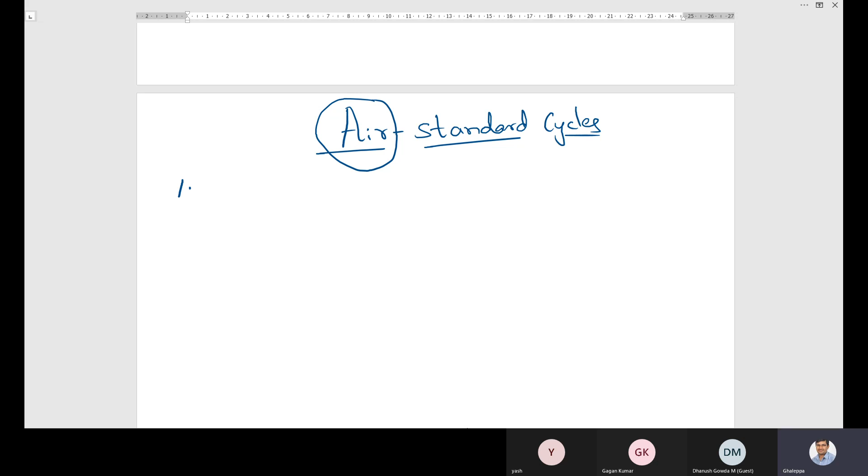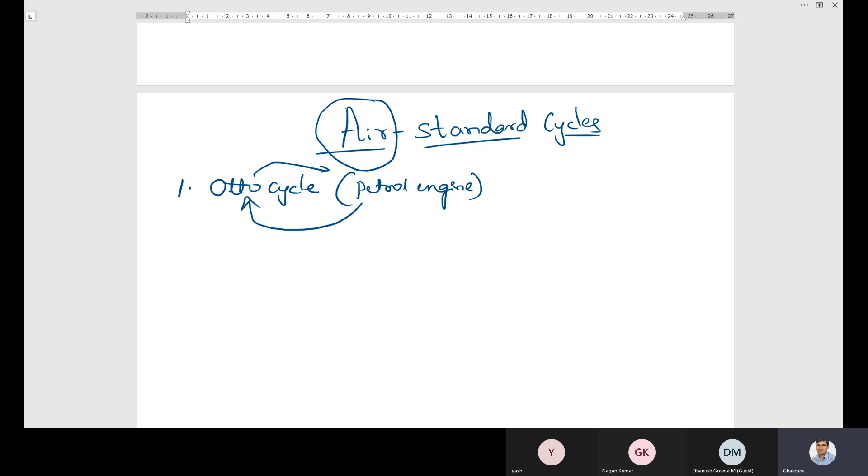The first cycle is the Otto cycle. Otto is the name of the scientist who discovered the petrol engine. So the petrol engine works on the principle of the Otto cycle, Otto's thermodynamic cycle. This cycle is also called the constant volume cycle. Don't worry, I will explain why it is called constant volume cycle in the next topic.

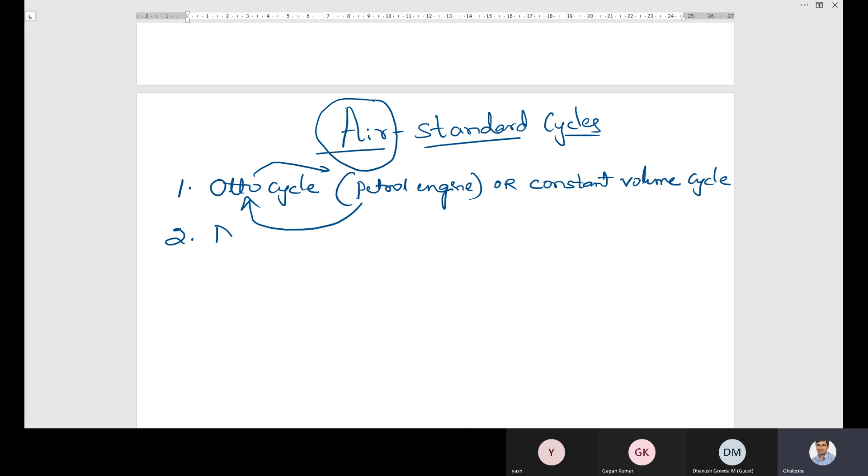The second type of air standard cycle is the diesel cycle. Diesel cycle is nothing but the diesel engine. Dear students, now tell me, diesel engine works on which thermodynamic cycle? In the first point I told you petrol engine works on the principle of the Otto cycle. Now you tell me, diesel engine works on which thermodynamic cycle?

So it works on compression, sir. No. Compression ignition engine is diesel engine. Both are the same - you can call it diesel engine or compression ignition engine.

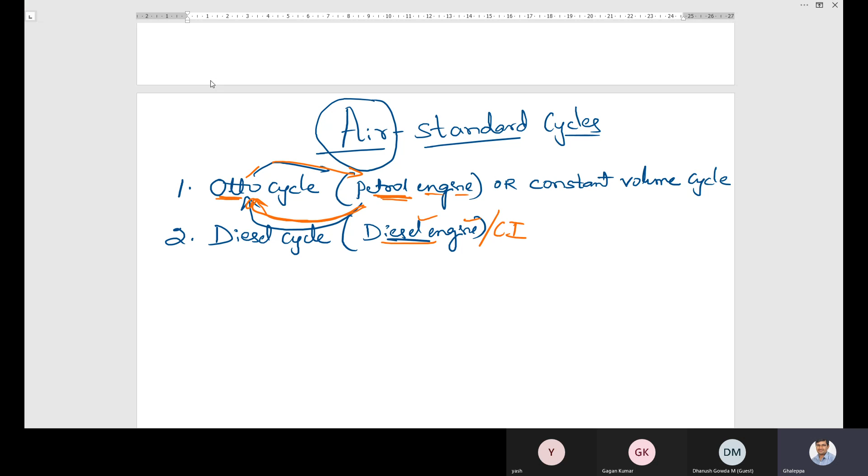But dear students, I am giving you a hint. Otto cycle is also called petrol engine. Otto is the name of the scientist who discovered the petrol engine. Petrol engine works on the principle of Otto cycle. So using this point, tell me now, who is the father of diesel engine? Who discovered the diesel engine?

Just look at how I'm explaining these points now. Otto cycle is related to petrol engine. Petrol engine works on the principle of Otto cycle. Just look at the first word - Otto. The second word is cycle. My question is, using this same concept, apply it for the second point.

Diesel engine works on the principle of which cycle? Diesel cycle. So diesel is the name of the inventor, the scientist who discovered the diesel engine. Keep this in mind - diesel is the inventor of the diesel cycle. So all diesel engines in the world work on the principle of the diesel cycle.

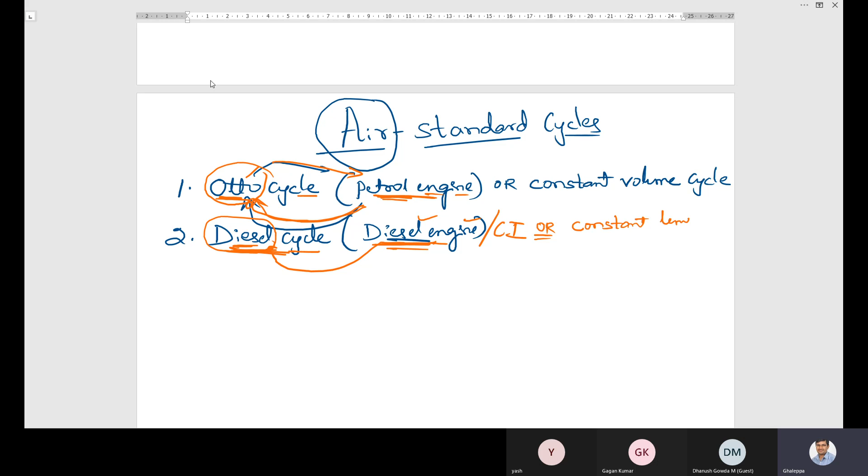So the diesel cycle is also called, keep this in mind - later I will explain when deriving the equations - the constant pressure cycle. So you need to understand the difference between these two. Petrol engine is the constant volume cycle, diesel engine is the constant pressure cycle. In interviews or viva questions in the laboratory next semester, they may ask you: who is the inventor of the petrol engine?

You should say Otto - Otto is the name of the scientist, sir, he is the inventor. And petrol engine works on which principle, which thermodynamic cycle? You should say it works on the Otto cycle, sir. And petrol engine is also called what? Spark ignition engine. Why am I telling you all these names?

The reason is we will be using these terms when solving numericals. In the numericals, they may not always give petrol engine - they may change the word and give spark ignition engine instead. So spark ignition engine is also called the constant volume cycle. Don't worry as of now, I will explain why it is called constant volume cycle. So the second cycle is diesel cycle.

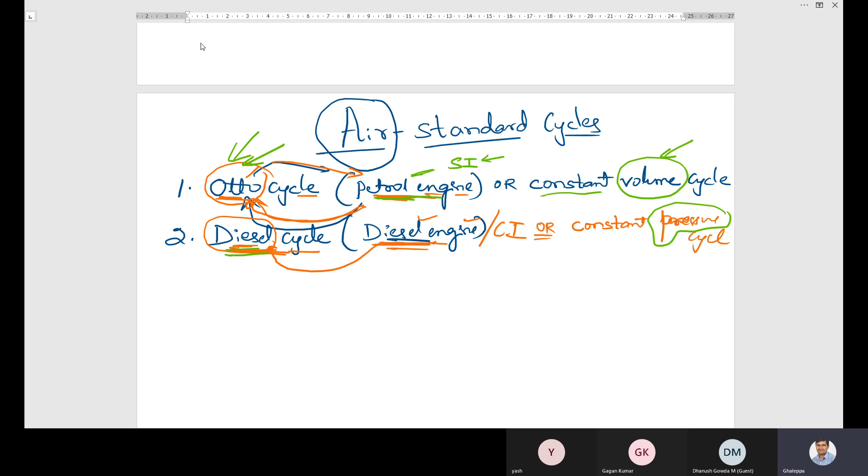These are two points. The third cycle, dear students, is the dual cycle. Dear students, what do you mean by dual? Here, using common sense, I am asking you in general - do not worry about the thermodynamics. So what do you mean by dual here? Dual means what? Try to understand what dual means.

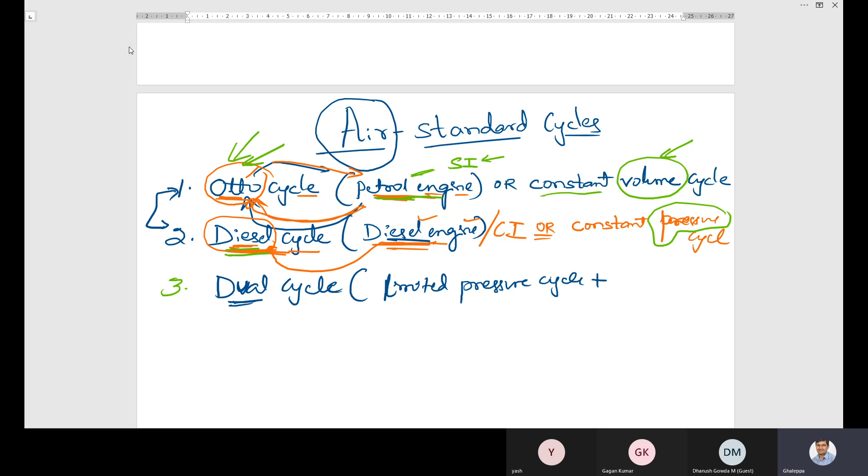In common terms, dual means double, that means two. So here, the dual cycle is a combination of these two - it is a combination of petrol engine and diesel engine. But we will not call it petrol plus diesel engine. Instead of adding petrol engine plus diesel engine, we use the terms limited pressure cycle and limited volume cycle. It is a combination of both - meaning 50% is constant pressure, the remaining 50% is constant volume. Have you understood now the difference between these two?

What are the three cycles? The Otto cycle, diesel cycle, and dual cycle. These three are what we are going to discuss in air standard cycles.

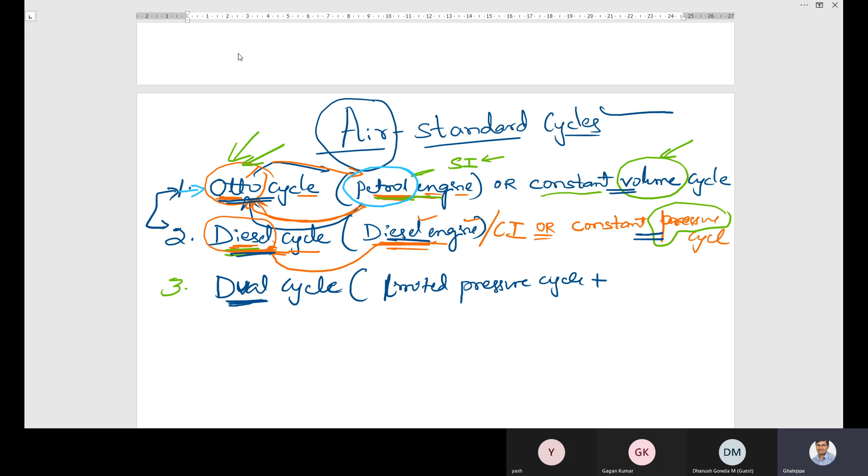Now the question arises, in the first cycle, Otto cycle, used in petrol engine, which is the working fluid? Petrol. In the diesel engine? Diesel. If it is dual cycle, you can use petrol or diesel or any gas in this third cycle.

Now why do they call it air standard cycles? Why not petrol cycle or diesel cycle? They are called, in general, air standard cycles. The reason is in our theoretical study, whichever engine it may be, petrol, diesel, or any gas engine, we are treating the working fluid as air.

I will be solving numericals on the Otto cycle, taking constant volume, but treating the working fluid not as petrol but as the standard fluid, that is air. Because air is a perfect gas, PV equals mRT, you can apply this equation. If I take petrol as working fluid, even theoretically I cannot apply this equation because petrol will not always behave like an ideal gas.

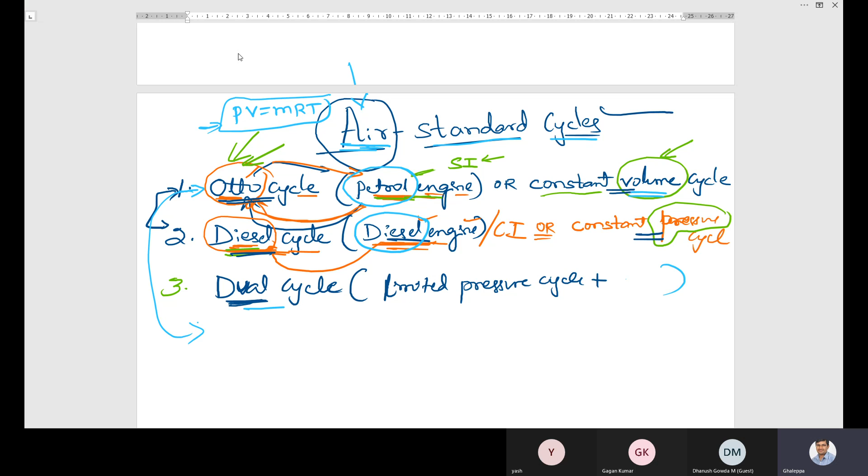We cannot. Understood? Why we are calling it air standard cycle? Because in all these three cycles, we assume the working fluid is air, and we solve numericals and performance parameters. Are you able to understand this first concept?

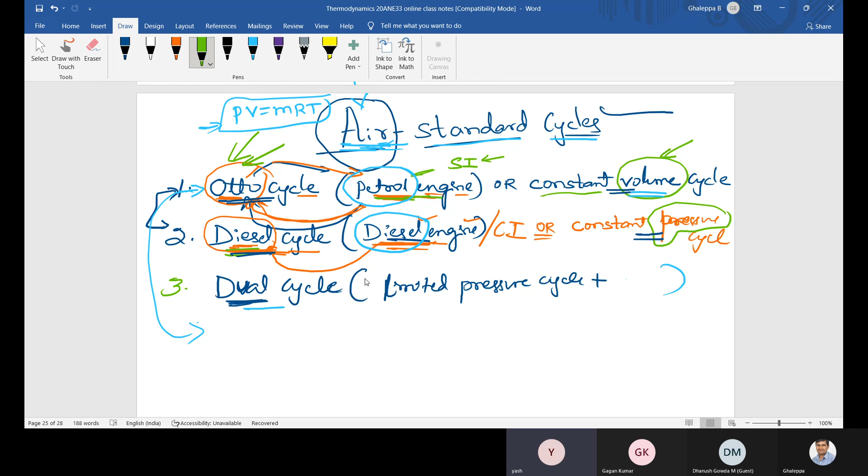Yes sir. Okay, now the second concept: a petrol engine is nothing but a piston cylinder arrangement. First I will draw one cylinder, and here it is. This is cylinder, this is piston.

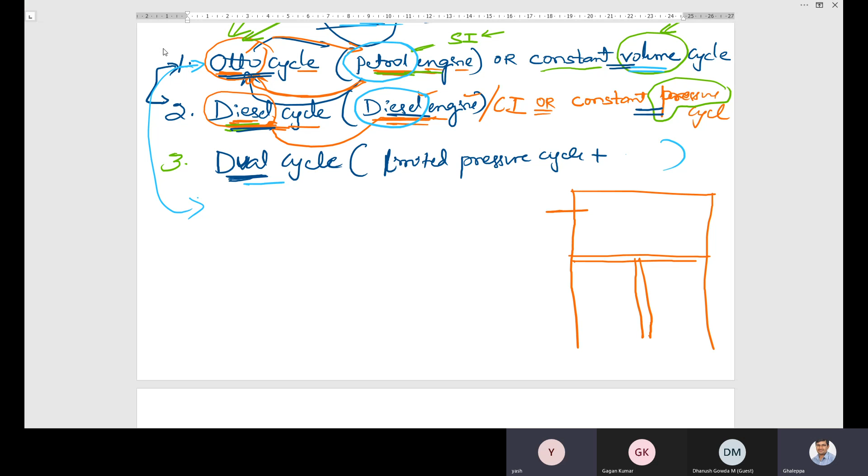And dear student, there will be two dead centers. What are those two dead centers in piston and cylinder in the automobile engine? Yes, very good, that is top dead center and bottom dead center.

So the distance traveled by this piston between these two dead centers, what do you call it? Assume during operation this piston will move up and down, towards TDC and come back and stop at BDC. So the distance traveled by this piston is called stroke.

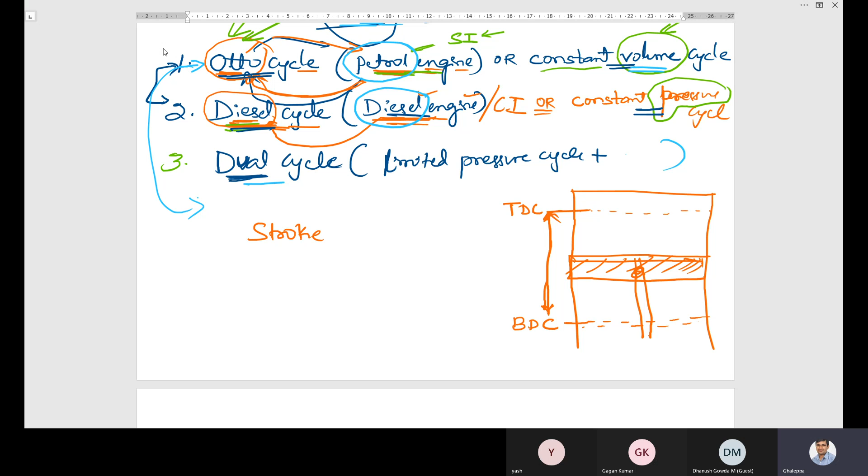Keep in mind, stroke means the height or distance between TDC to BDC. I will represent it with the symbol L, stroke length. If it is stroke volume, I will call it Vs. Keep in mind, Vs is the stroke volume, or you can call it swept volume, stroke volume.

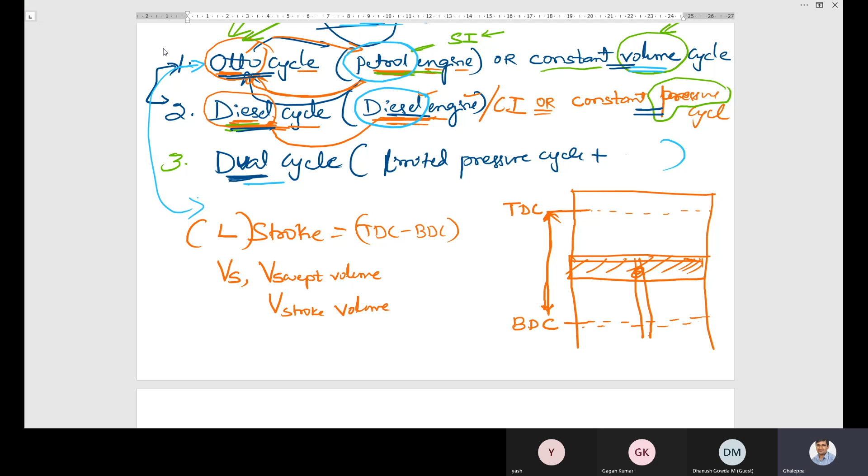And one more thing, since it is a cycle, this piston is moving up and down, so it is undergoing some displacement, so it is also called displacement volume. All three are the same. Here Vs, and I can also write it as VD.

And dear students, what is stroke? This is L, stroke length, if given in the numerical it is L, that is the distance between TDC to BDC. The unit of these three, swept volume, stroke volume, or displacement volume, is always in meter cube.

Now I will show you one picture how to identify. There is another volume that comes into the picture. I will ask you a question: what is the volume of gas here, when the piston is in top dead center? This is the position of the piston, assume this is the piston.

Instead of here, the piston has come to top dead center and all gases have got compressed here. So what is the volume of this gas, what do you call it? Clearance volume. Usually clearance volume. Very good, Vc is called clearance volume.

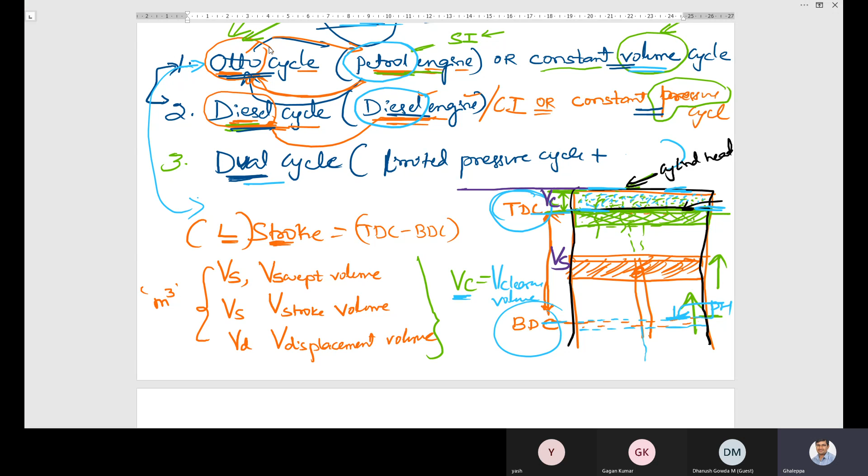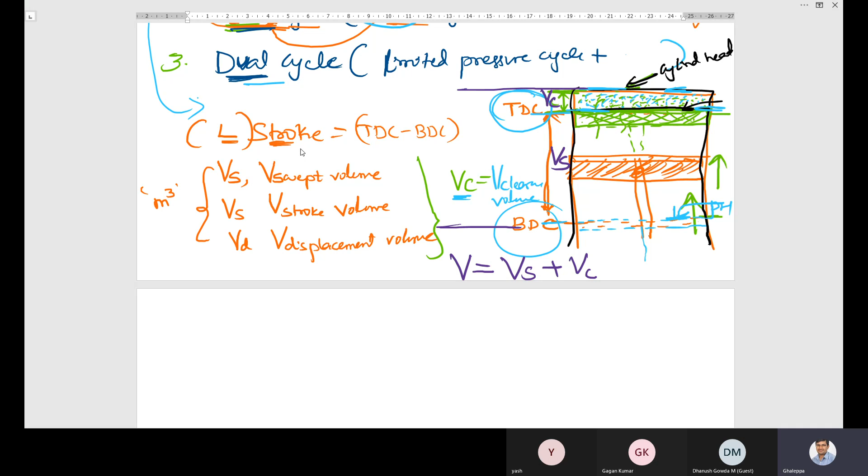For example, if you have a Pulsar 150cc bike with you, what is meant by 150cc? Pulsar 150cc and Bullet 350cc, Classic, Thunderbird 350cc, like that - there are many engines out there.

So 150cc means what? It is called cubic centimeter, 150 centimeter cube. The unit of this volume given is 150 centimeter cube. 150 is nothing but the total volume of the cylinder. If you take a petrol engine, the Splendor petrol engine is 100cc - that is the total volume of that Splendor engine. Out of 100, some portion is VC and some portion will be VS.

Sometimes in car engines, maybe Tata Sport or EcoSport or Ford, they write on the back side of the car specifications like 2 liters, 1.5 L. We might have seen some specifications on the car at the back side. 1.5 L is nothing but the volume of the cylinder, each cylinder. Sometimes you may observe 1.5 into 4, meaning there are 4 cylinders, each with volume 1.5 liter, like that.

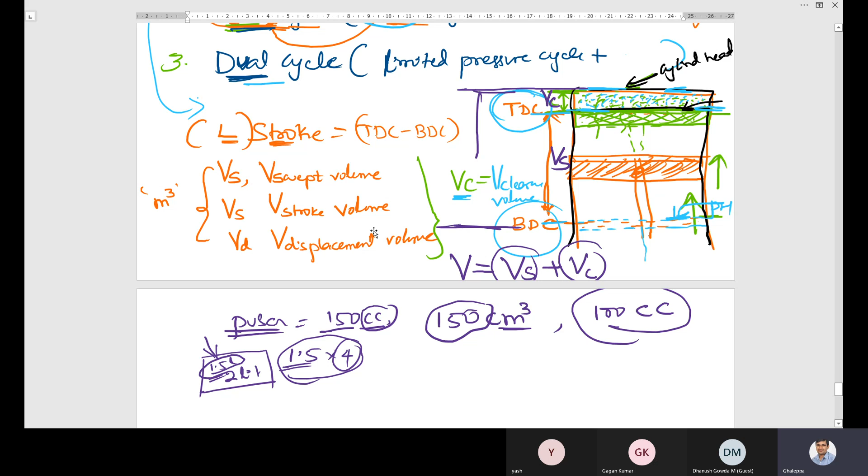I will show you one picture now, how to identify the clearance volume, stroke volume, and all. Dear students, can you see this GIF file picture?

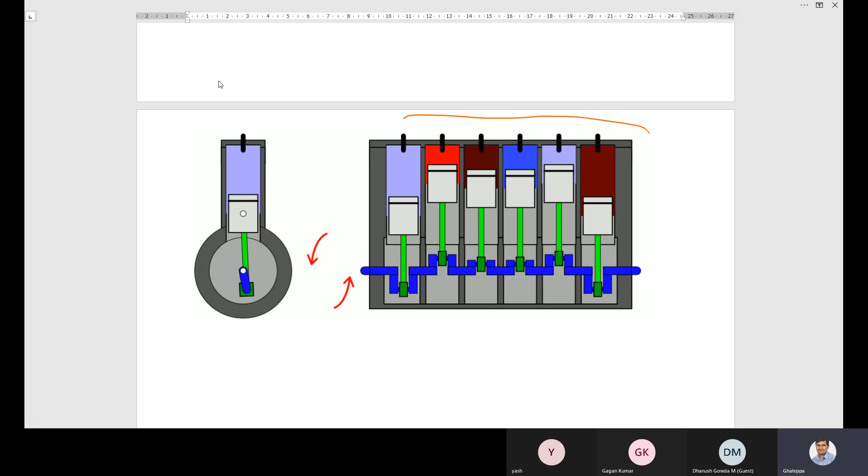Dear students, now you tell me how many engines, how many cylinders are there? There is only one engine, but how many cylinders are there in this picture? One, two, three, four, five, six - 6 cylinders. And keep in mind, I will be writing N, number of cylinders are 6.

Now I don't want to elaborate more on number of cylinders. Just keep in mind in the numericals you will be given n equal to 6, n equal to 5. And dear students, in this picture, on the left hand side, how many cylinders are there? N is equal to 1. Now we need to identify the VC, VS, and all.

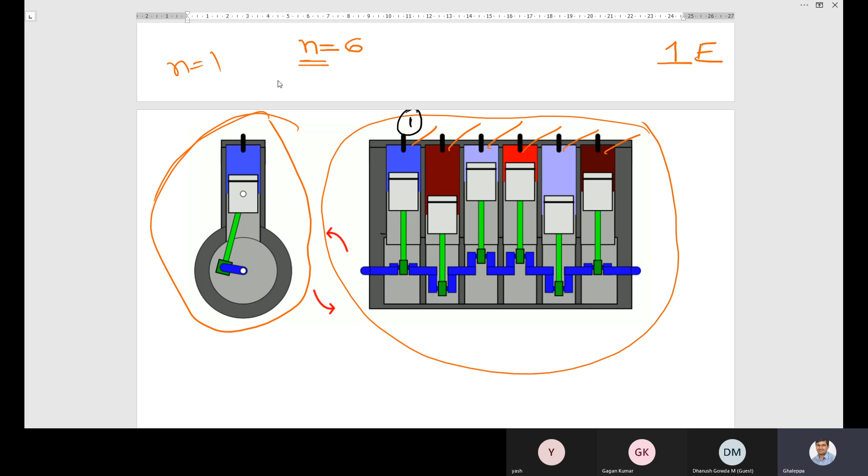Now I will take the picture here. In the first cylinder, all of you look here. This is the bottom side - see, up to here it will move, it will not move below this, so it is BDC. And here, up to the maximum point it is moving up to here, that is top dead center. If it is moving up to here, you assume it is BDC up to here, otherwise it is stopping here - you take it as BDC.

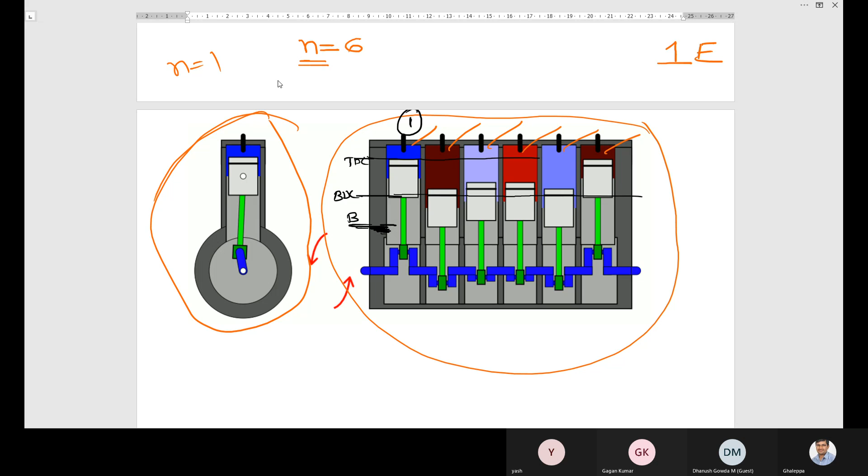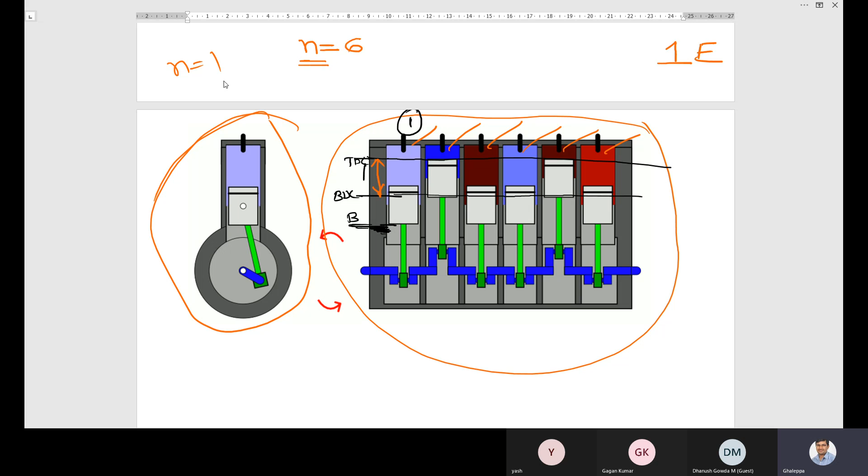All engines are at the same BDC - see here, this is also same. It will stop here only, and that is top dead center. The distance between these two, in the first cylinder, I will call it as VS. The distance between TDC and BDC is VS, or VD, displacement. Why you call it displacement is because the piston is undergoing reciprocating motion.

There is a displacement of the piston, that is called displacement volume. One more important point: the combustion of the gas takes place only in the VC part - this part, combustion is taking place. There is a spark plug for each cylinder where combustion takes place. If somebody asks where combustion of petrol takes place in the petrol engine, you should say it is at VC, the clearance volume. Only in the clearance volume does combustion of the gases take place. So now I understood what is VS, VD, and VC - clearance volume, swept volume, and stroke volume. Remember this.

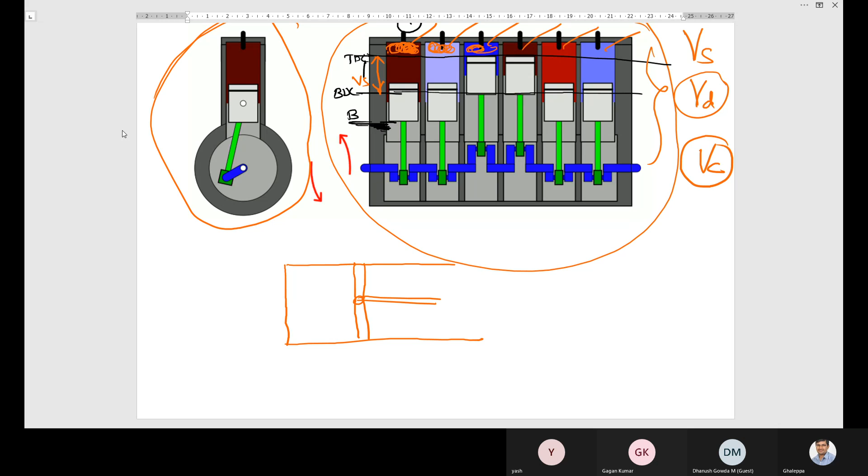Now, dear students, this was a vertical cylinder. I will draw a horizontal cylinder. This is the horizontal cylinder, this is a piston, this is the connecting rod. This is the maximum point where the piston moves downward, so it is called BDC. And this is the maximum point where the piston will move in the upward direction, so I will call it TDC.

Let me take a copy of this picture. I will explain it on the next page, it will be easier. Let me copy the page.

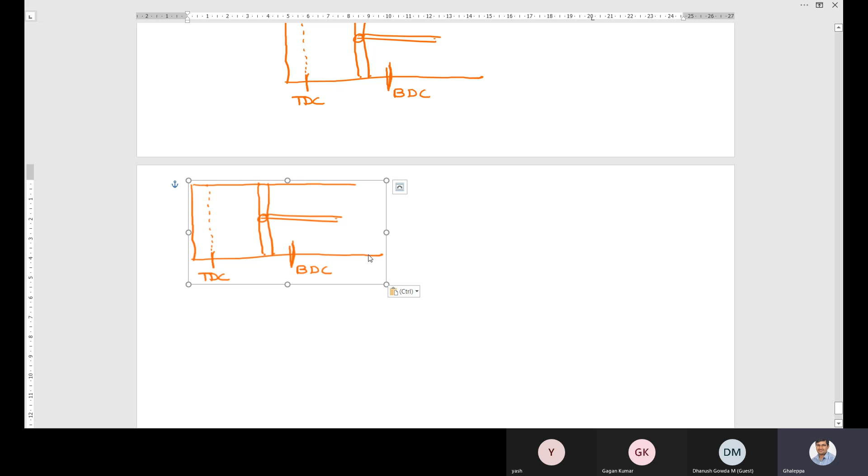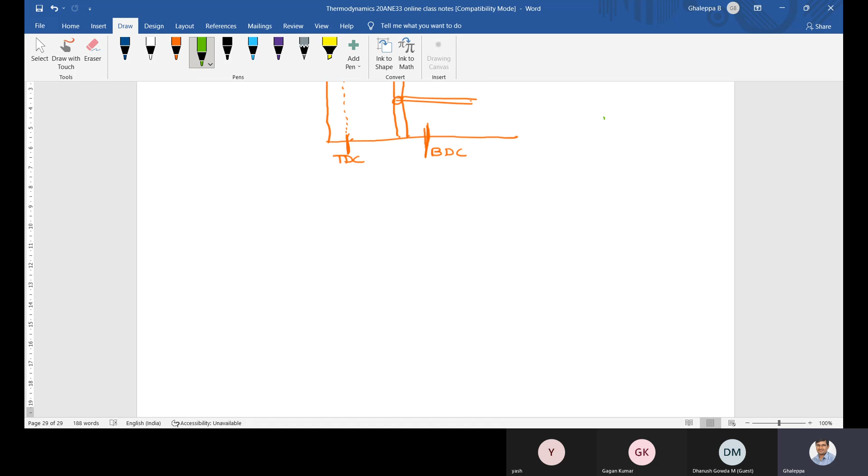Now, the distance between these two, what should I call it? What is the distance between TDC to BDC? I'm writing distance, length - what do you call it? Stroke. Stroke will be represented with which letter? L.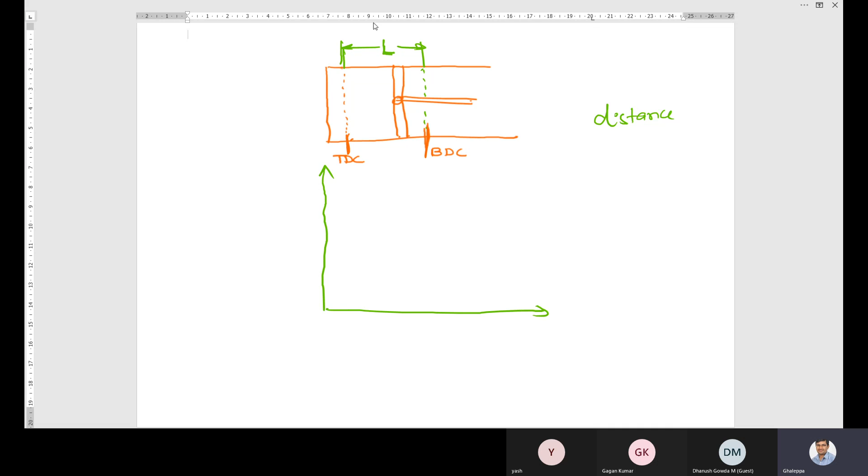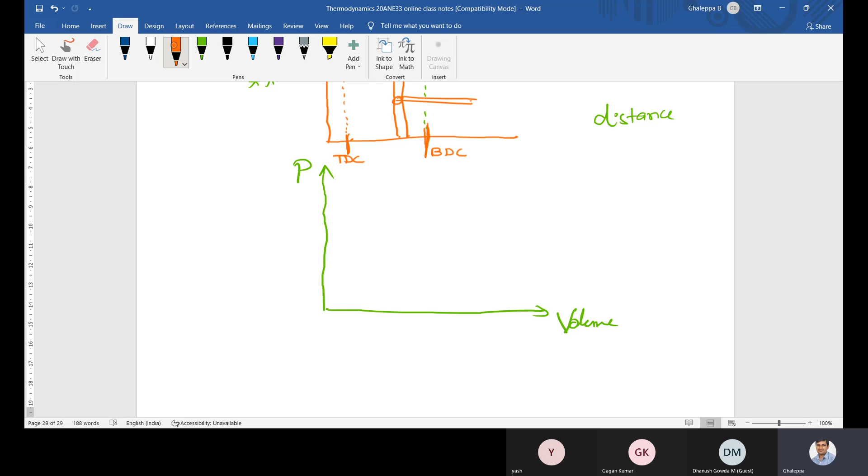Now, my dear students, we will always draw PV and TS diagrams for petrol engine, diesel engine, as well as dual cycle. This is important - how to draw PV and TS diagram of any engine. Just draw one horizontal axis, that is volume, and vertical is pressure. Now, this should be the dead center - we cannot move beyond this. You cannot go beyond these two lines because the piston is always moving between top dead center and BDC, bottom dead center. Compression takes place from bottom dead center to top dead center, and the next stroke comes from TDC to BDC. The PV diagram should lie between TDC to BDC, keep that in mind.

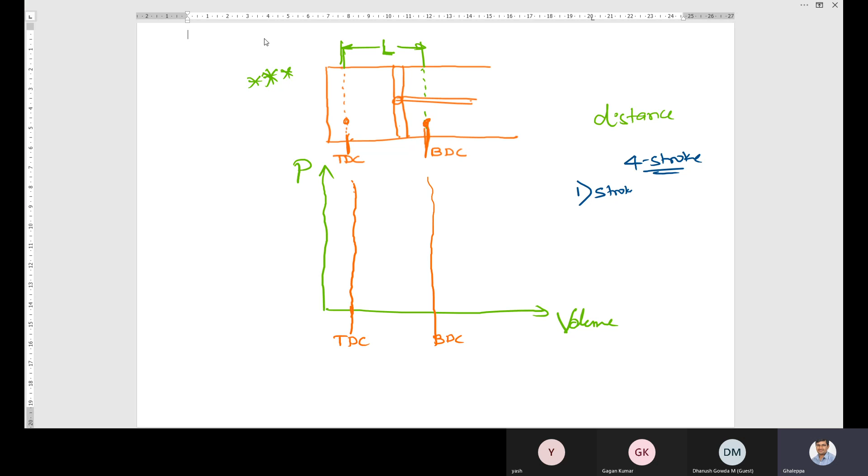Dear students, how many strokes will there be in one cycle? For example, if it is a four-stroke engine, how many strokes will there be? Four strokes. Which are those? First stroke is compression - I will write compression. Next, after compression, combustion, which is also called heat addition.

After that comes the expansion stroke, or power stroke. What is the last of the four strokes? Exhaust.

Dear students, combustion is also called heat addition, so I will write heat addition here. And the opposite word of heat addition will be heat rejection, or exhaust. Dear students, there are small mistakes you need to correct. Here there are six processes, but how many strokes? There will be only four strokes. Strokes are different, processes are different. I will tell you which are the strokes, which are the processes.

Before compression, there is one more process that takes place. What is that process called? For example, this is the piston and cylinder alignment, with the inlet valve and exhaust valve. What will be the basic first step when the engine starts? When the piston moves downward, suction takes place and the inlet valve is open. When the piston moves downward, the suction creates vacuum pressure inside the cylinder. Vacuum means less pressure, below atmospheric pressure, while outside it is above atmospheric pressure. Fluid always flows from high pressure to low pressure. Vacuum is nothing but low pressure, below atmospheric pressure. So when suction pressure creates a vacuum inside the cylinder, the petrol and air get inside.

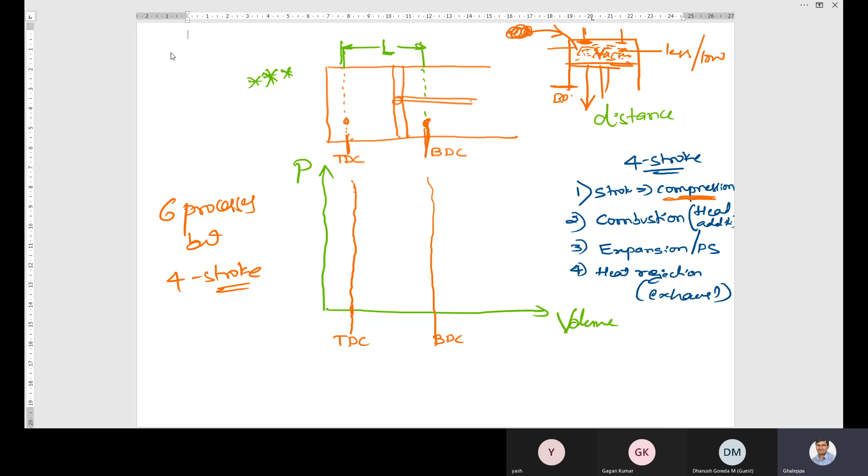This happens through the inlet valve - the inlet valve becomes open, and the piston moves towards BDC, that is from TDC to BDC. This is the first stroke, the suction stroke - suction stroke and suction process. I will write the process on the left and the stroke here, to avoid confusion. So the first process is the suction process.

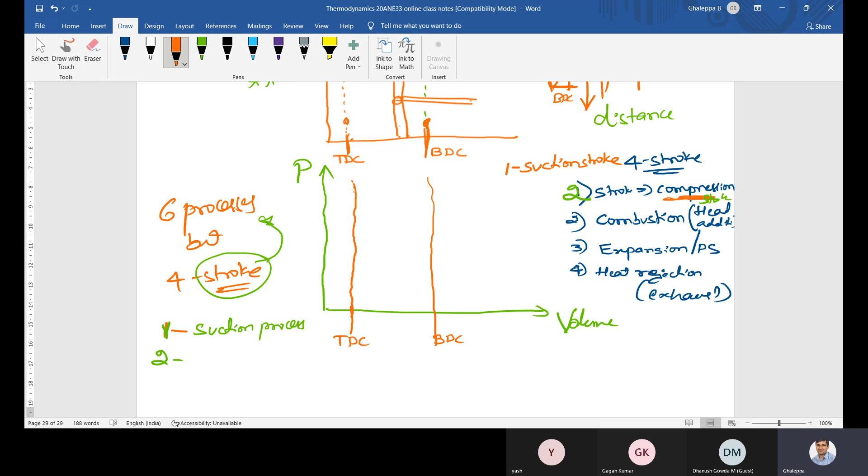Keep in mind, all strokes are processes, but all processes are not strokes. Please try to understand what this means - all strokes are processes, but there are some processes in the engine we cannot consider as a stroke. Next, the second stroke is compression - what you said is right, that is the compression stroke, so stroke is nothing but a process. All strokes are processes, so I will write here compression. During the compression process, the piston moves from BDC to TDC.

Compression means it is going upward, from BDC to TDC. So I will draw the PV diagram for the compression process.

At the beginning of compression, it is at BDC, because compression begins from BDC to TDC. During compression, the volume of gas inside the cylinder decreases when you compress it. Volume decreases, and pressure increases.

So now we have to draw the PV diagram for the compression process, the second process, such that volume on the x-axis decreases and pressure on the y-axis increases. This is point number 2. If someone asks you to draw a compression stroke in a PV diagram, you should start from BDC and end at TDC. So volume is decreasing. This is the initial volume V1 and this is V2.

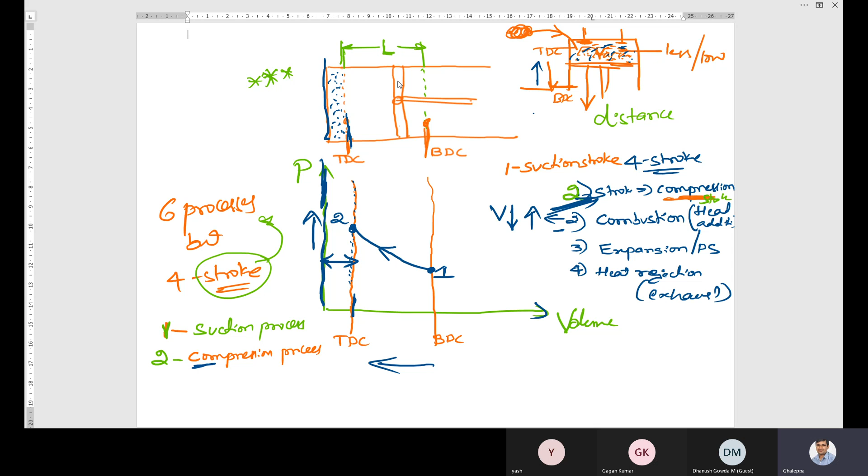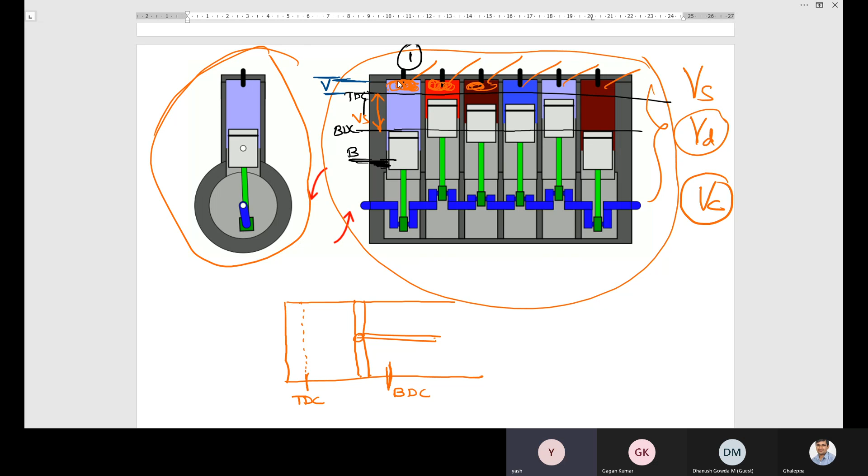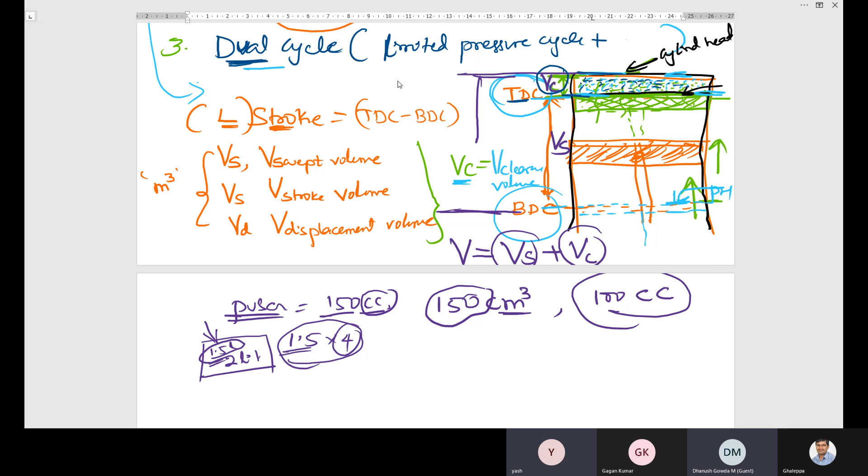VS. Okay, what is this? The distance between cylinder head and piston at TDC, what do you call this gap? VC. This is VC, not VS. VS is the distance between BDC to TDC. If I ask what is this volume, you should say it is VS, stroke or displacement volume. Keep in mind, this one is VC, clearance volume.

I cannot move the PV diagram to the left of this straight line. We should stop here because the piston will not move beyond TDC, and it will not move beyond BDC either. So the first process is suction stroke, and the second process is compression stroke.

Sir, we have not represented the suction stroke here. Yes, I have not shown it here. That is 0 to 1. The pressure inside the cylinder, we assume it is constant, so it is 0 to 1, which is the suction stroke, suction process.

The second process is compression process, that is compression stroke. Next, which process will be there? You said it is combustion. Dear students, keep in mind, combustion is only a process, it is not a stroke.

Why it is not a stroke? Because during the combustion process, there is no movement of the piston. The piston will be at TDC only, and combustion takes only milliseconds. We are not saying it takes 5 minutes, 10 minutes, or 1 hour. Within a fraction of seconds, the combustion process completes. So combustion happens at TDC, when the piston is at TDC.

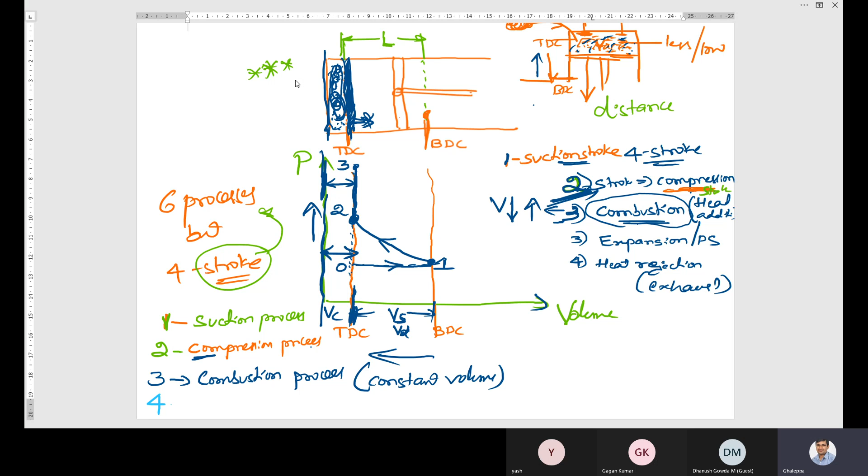So next, the fourth process. Dear students, what is the fourth stroke? Expansion stroke, or expansion process, both are the same. During expansion, the piston will again move towards BDC, coming from TDC to BDC. So there is a displacement volume. During expansion, does the volume increase or decrease? Volume increases. Pressure?

Pressure is not constant. Whenever there is a change in volume, there will be a change in pressure. So when the piston is moving from TDC to BDC, volume increases, so I should draw a downward line. Why downward and not horizontal? Because pressure decreases as volume increases.

So it is the expansion process. The fifth process is the exhaust stroke, which is correct, or heat rejection. So what type of heat rejection? Again, it is constant volume heat rejection.

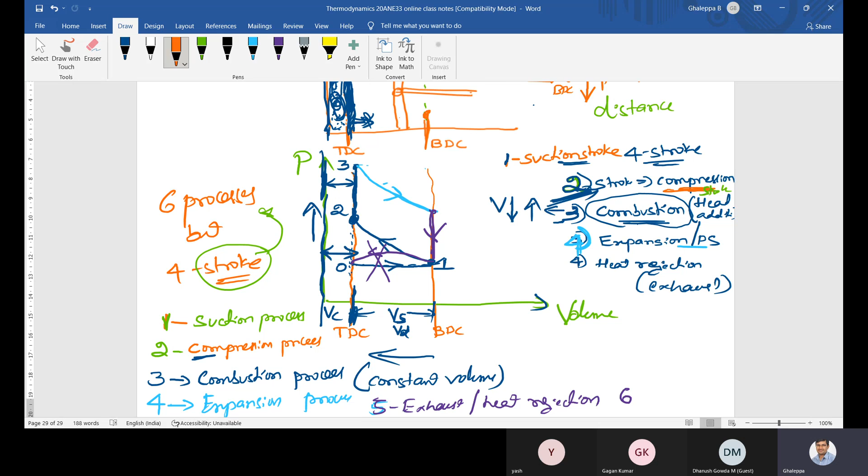The first process is compression. Second process is combustion. Third process is expansion. Fourth process is heat rejection. So out of these 4, there are only 2 strokes and 2 processes. For example, 1 to 2 is the compression stroke, so it's the compression process. Second is constant volume combustion.

There is no movement of the piston during the second process, that is during 2 to 3, it is at constant volume, so we will call it only a process, not a stroke. The third process is expansion. During expansion, there is movement of the piston from TDC to BDC, so this is called the expansion stroke or expansion process.

Why am I calling it expansion stroke? Because there is displacement of the piston, moving from TDC to BDC. Whenever there is a change in displacement or movement of the piston, that is called a stroke. If there is no movement of the piston, no change in its position, then it is called a process only.

So here during 3 to 4, it's expansion, and 4 to 1 is heat rejection. So I will call 4 to 1 as QR, 2 to 3 as QS, and these two are expansion and compression processes.

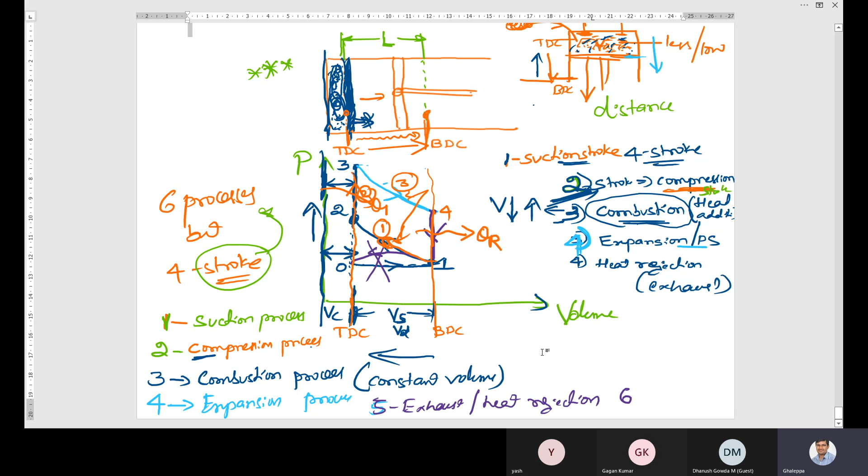So first cycle is, now I will draw one more time. Don't get confused, okay, I will repeat the same words again and again. So first, the cycle we are discussing is the Otto cycle.

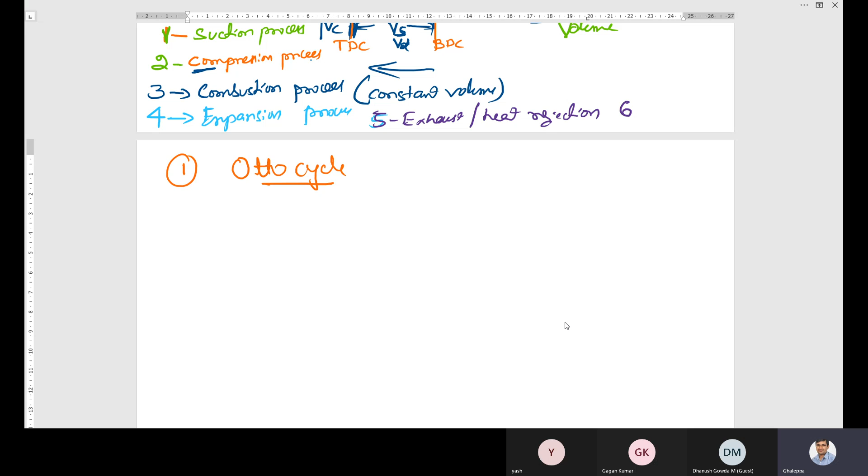Otto cycle is also called the constant volume combustion cycle, or in practice, we call it the petrol engine. All petrol engines work on the principle of the constant volume combustion cycle. Who is the inventor of the constant volume combustion cycle? The father of the constant volume combustion cycle, or petrol engine, is Otto.

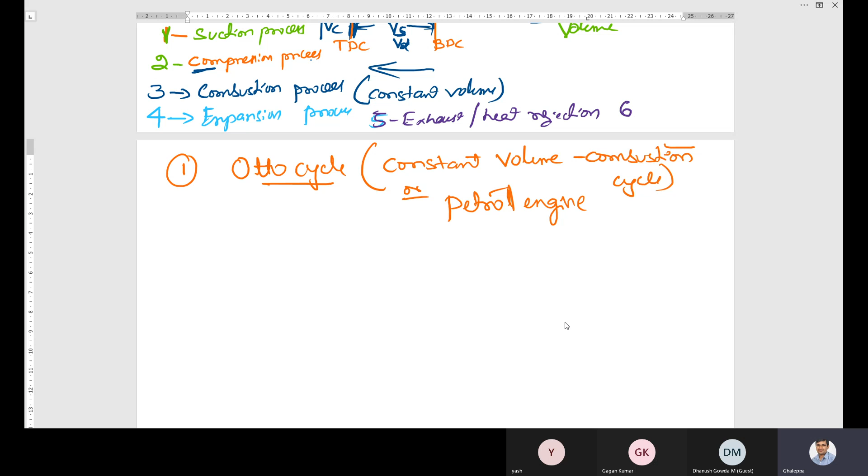You must draw the PV and TS diagrams, my dear students. Please make a habit of drawing PV and TS diagrams for each cycle, so you do not get confused. So first you write P on the y-axis, volume on the x-axis, and we will always draw 1 to 2 first.

1 to 2 is the compression process. During compression, you already agreed it will move from BDC to TDC. Locate some point. BDC is here, TDC is here. BDC is always away from the cylinder head. Assume in your mind this is the cylinder head, the y-axis is the cylinder head, imagine it. So it will move from BDC to TDC.

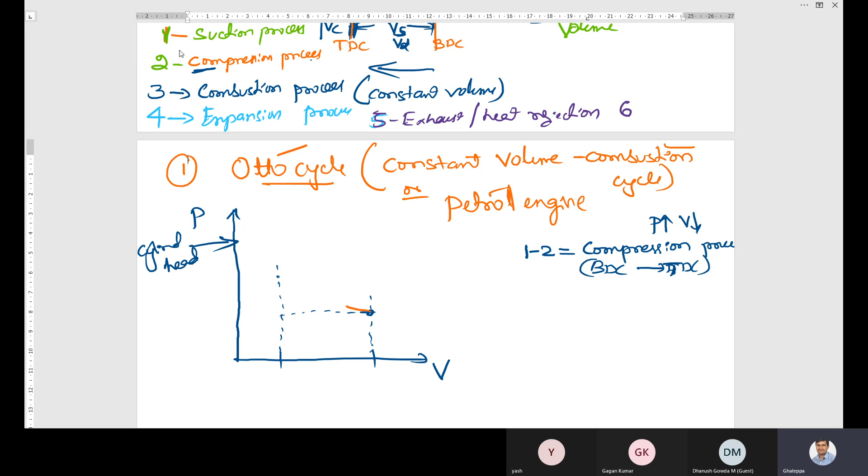It should stop here, but don't draw a horizontal line. Why not? Because during compression, pressure increases and volume decreases. You must draw the PV diagram so that pressure increases and volume decreases. So I have to draw a curved line. I will stop here at point number 2, and this is point number 1.

And dear students, for 1 to 2, shall I show the upward arrow mark or downward arrow mark? Tell me please, using this concept. Upward arrow mark or downward arrow mark? Pressure increases during compression and volume decreases, and this is the starting point.

Are you there, my students? Yes, sir. Hello? Yeah, okay.

Upward arrow mark or downward arrow mark? This is the initial point, I'm using the word initial point. This means where it should be at the outlet, the end point, point number 2. Initial to final is upward arrow mark. This is P1, this will be P2. So pressure increases from initial to final as pressure increases during compression.

And from here to here is V1, volume at point number 1. You should always start from the origin. And from here to here is V2. So from V1 to V2, the volume decreases. Initially volume is V1, say 1 meter cube or 2 meter cube. Again after the end of the process, the volume decreases, so volume is less here and more there.

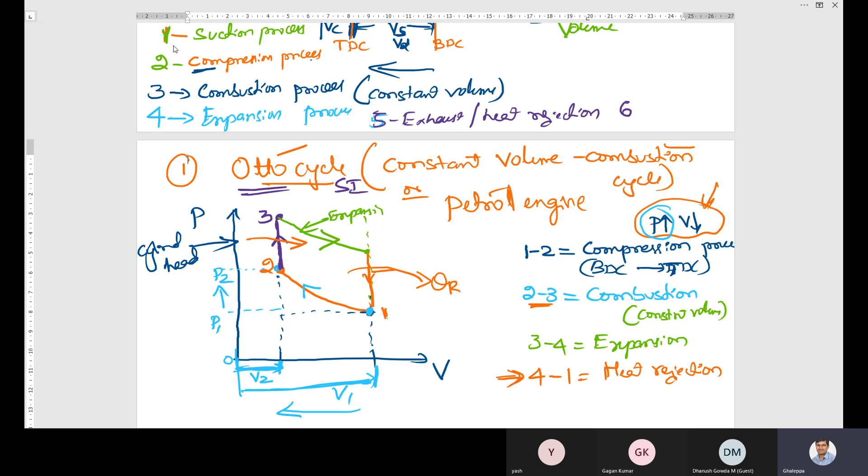Heat is rejected. What is the opposite word of heat rejected? 2 to 3 combustion, during combustion what will happen? Heat addition. Heat addition means heat supplied or heat added. Very good. Okay, it will happen. Don't worry.

So based on QS and QA, my dear student, what should I write for heat rejection? QP or QS, QX, QY? What should we write instead of Q for heat rejection, which is the best word for representing rejection? QR. QR stands for rejection, already I have written here. QR, QS is supplied. Okay.

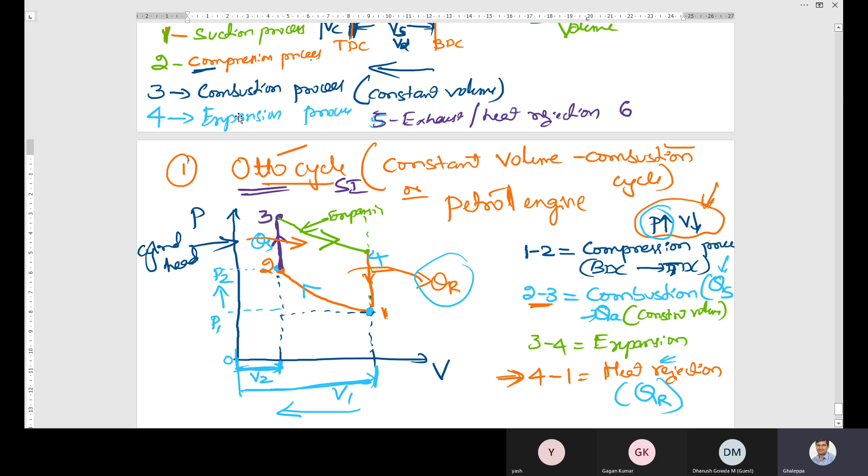So we'll stop here only, because you will get confused. I will make you 100% clear with respect to this. Okay, dear students.

I need to calculate VC. You tell me, VC, whether VC is equal to V1 or VC is equal to V2 in this diagram. No. You tell me which is VC. VC is equal to V2. Very good, mate, very good.

So VC is always, I told you, VC is the volume of gas between the cylinder head and when the piston is at TDC. This is in TDC position. So this is called VC.

VS means what? Swept volume. Or one more name? Stroke volume. One more name? Displacement volume.

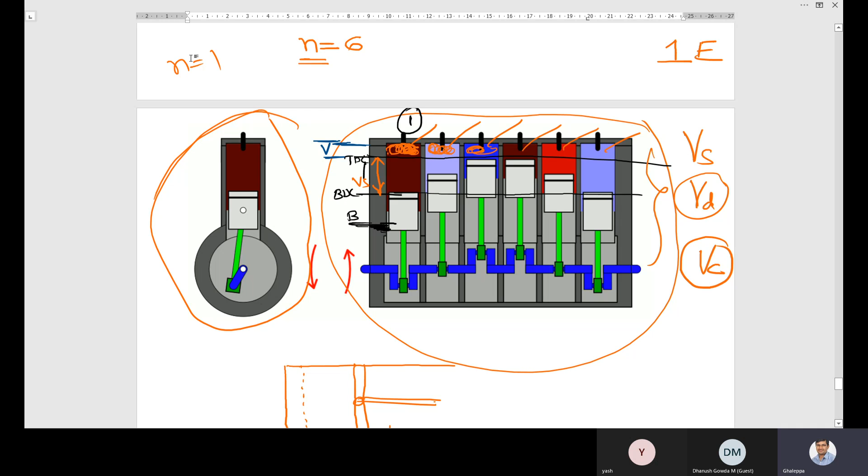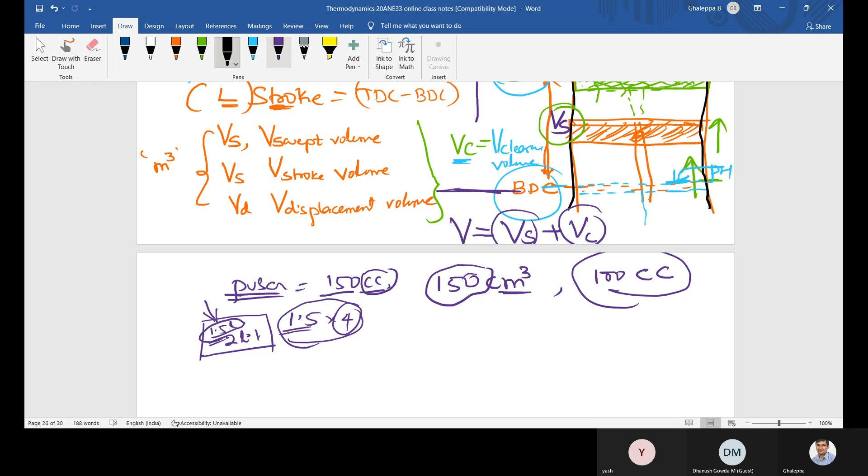Go to the top screen, here. Where is the displacement or VS? VS is between... from where to where would you call it VS? Between TDC and BDC. Yes, very good. Between TDC and BDC, we will call it VS or VD.

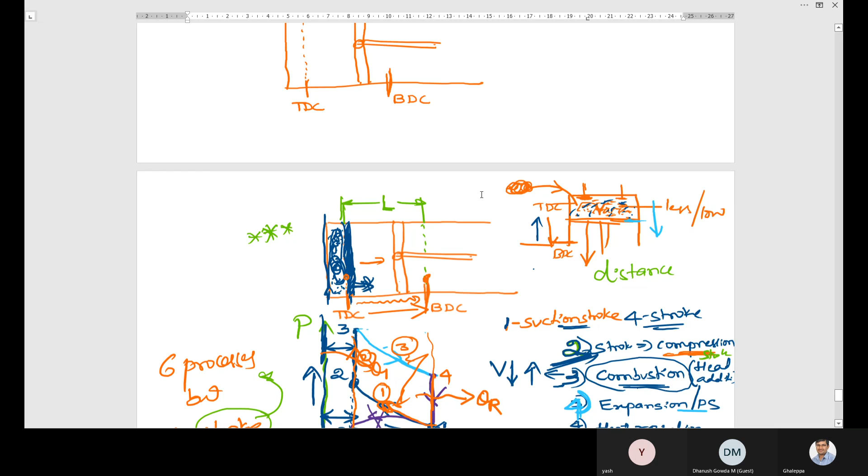Okay, now come back here. Which number is TDC? There are 4 numbers, 4 points: 1, 2, 3, 4. My dear students, out of 4, which points are related to BDC, and which 2 points are related to TDC? Tell me.

2 and 3 is TDC, 1 and 4 is BDC. Yeah, 2 and 3 are TDC points. Very good. Because 2 is also on TDC, point number 3 is also on TDC, this is called top dead center. So 2 and 3 are top dead centers. Very good, 1 and 4 are bottom dead centers.

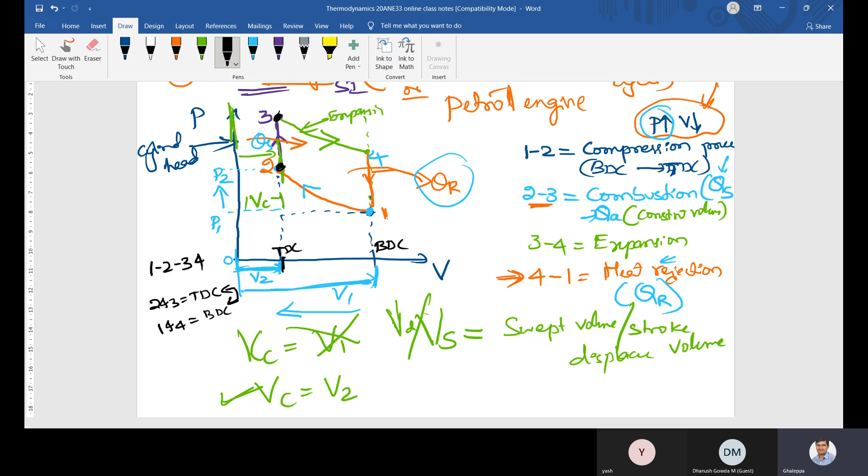Okay, so between TDC and BDC the piston will move, it will have reciprocating displacement motion. Okay, now this is at BDC. Now I am asking you to calculate this distance. How will you calculate the distance between TDC to BDC? I need to calculate this distance. How will you calculate?

I know this distance from here to here, and also here to here. This is called VC. From here to here, this is V1. This is VD, that is displacement volume or VS. We can say that VD or VS is equal to... okay, my intention is that you must tell me, I will give an example.

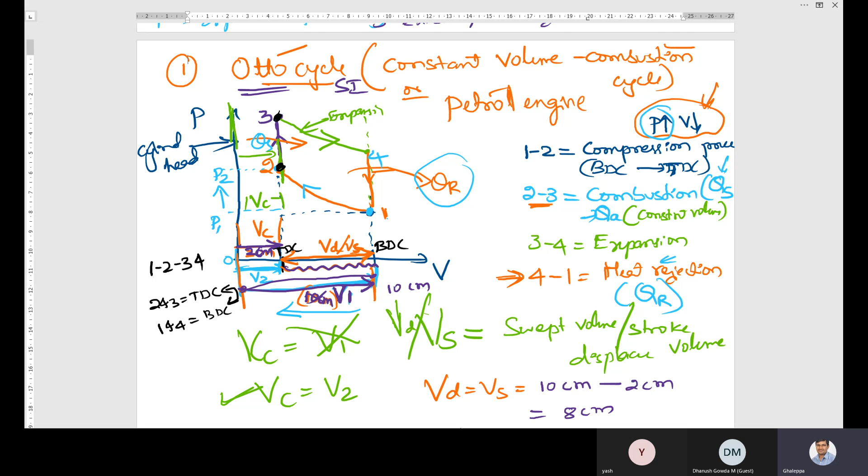That is VS. Now you tell me in terms of these notations, V1, V2, using this way tell me. Tell me that way. Gagan, are you there?

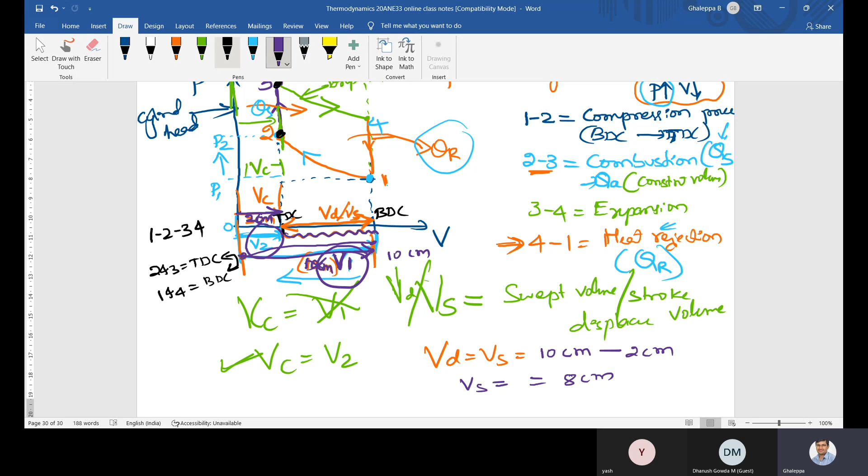How to calculate VS? Look, think a little. It is written on the board clearly. I need this in terms of, in general. Okay, you tell me in terms of V1, V2.

Yes sir, V1 is the whole volume and V2 is the...

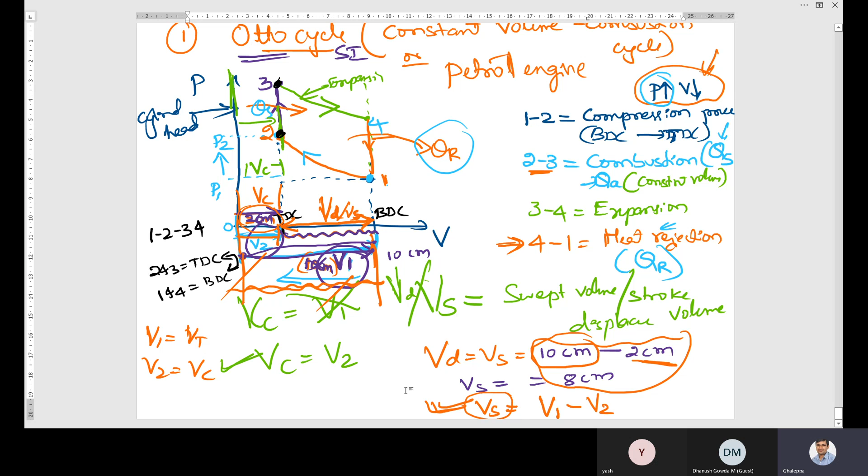So what are the points we discussed today? Simple points is, how many air standard cycles are there in your syllabus? How many air standard cycles are there? Three. What is the first one?

First one? Otto cycle. Second one? Diesel cycle. Third one? Dual cycle.

Otto cycle is also called Petrol cycle. Sometimes they will ask you, in the Otto cycle, is combustion at constant volume or constant pressure? Constant volume. In the Otto cycle, constant volume, correct. Constant volume combustion means heat supplied. Combustion is nothing but during combustion only heat will generate, no? Yes, always heat will be generated, heat is supplied during combustion.

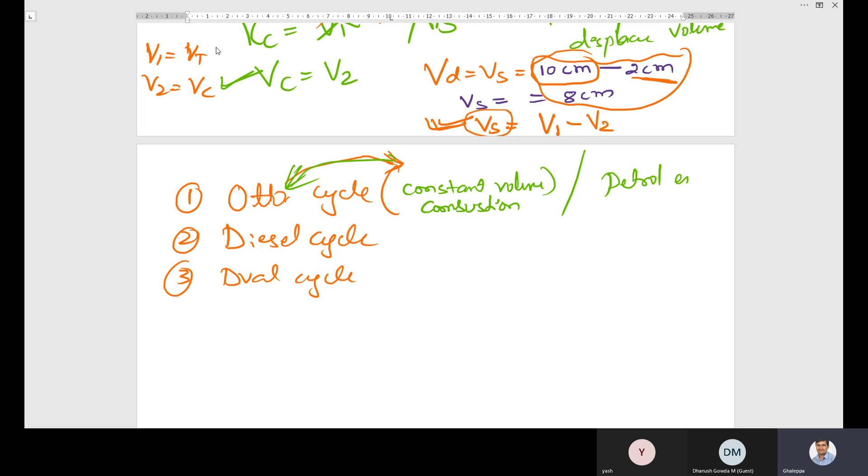Okay, in practice, all petrol engines work on Otto cycle. What are those engines? Petrol engines work on Otto cycle. Yes. Okay, why do we call it as air standard cycles?

Why don't you call it petrol standard cycles or diesel standard cycles? Why do you call it air standard cycles? Use of air. Yes, we are assuming in these cycles the working fluid is air, and we are solving the numericals using air, because air is a perfect gas.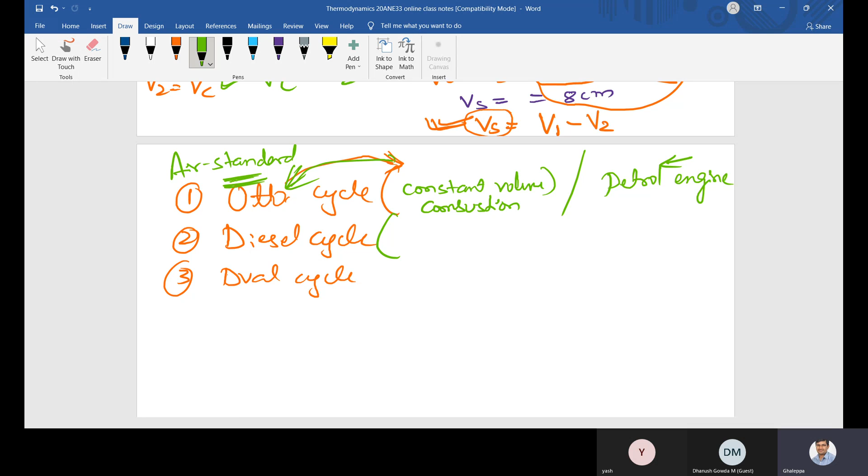Okay, perfect fluid. So we assume it as air, but in real the working fluid will be petrol. In diesel cycle, combustion takes place at constant pressure. Keep in mind. Anyway, I will explain in the later class. Don't worry. Constant pressure.

Constant pressure cycle. So the engines that work on diesel cycle, what is the name of the engines? What we call it is Diesel engine, diesel engines or diesels. Correct.

Very good. So dual cycle means, whether it is constant volume or constant pressure, or it is a mixture of both. Mixture of both, limited pressure cycle. Yes, it is a mixture of both. So you should use the word: some percentage of combustion is constant volume, some percentage of combustion is constant pressure. So it is a combination of both, constant volume heat addition plus constant pressure heat addition. So it is both constant pressure as well as constant volume.

Okay, now you can ask a question, where will such type of engines, dual cycles, be used? All marine engines work on dual cycles. Okay, the two-wheeler works on Otto cycle, petrol engine. Some four-wheelers, car petrol engines also work on Otto cycle. Trucks and some heavy-duty vehicles work on diesel cycle. So as an engineering student, you should understand which engines work on dual cycle - yes sir, the marine engines where we need more power, so you should understand marine engines all work on dual cycles.

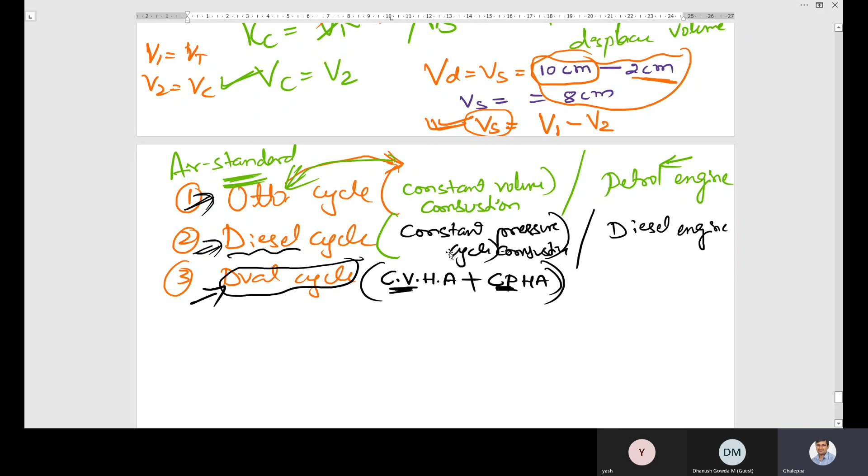So tomorrow we will derive some expressions - how to write heat supplied, heat rejection, efficiency of Otto cycle and all. Okay, please my dear students go through this video once again, you will understand better so that tomorrow's class will be easier for you. So don't say that already a 1 hour video is there, it is a waste of time like that. Okay, if you understand today's class, tomorrow's class will become very easy.

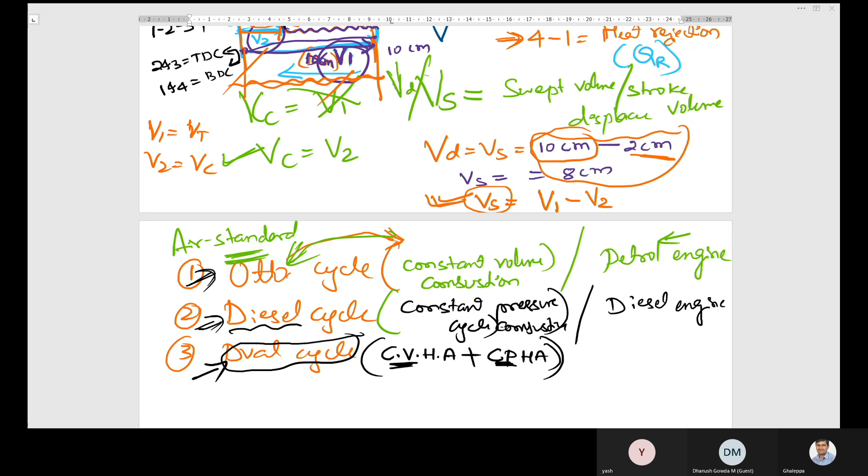Okay sir. Okay, any doubts here? No sir. No sir.